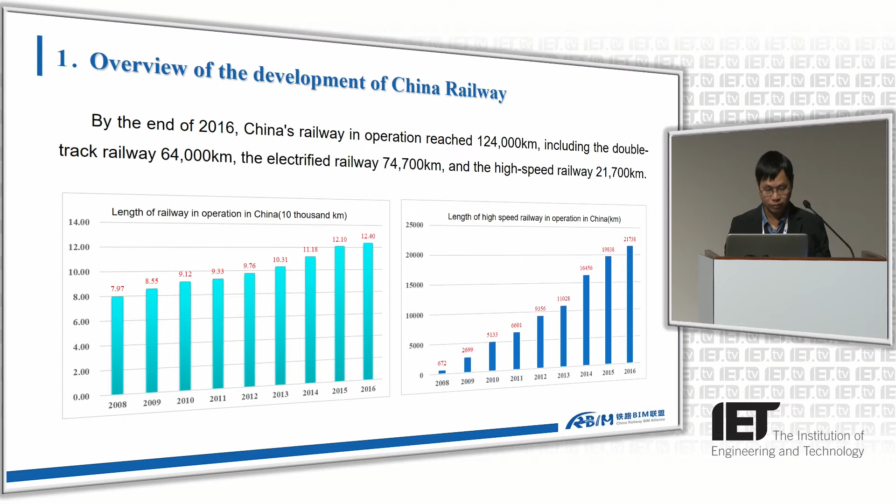By 2025, the scale of the railway network will reach 175,000 kilometers, including 38,000 kilometers high-speed railway.

Second, development of China Railway BIM Standard. Railway is an important traffic infrastructure. Its informatization is an important carrier and means to realize the intelligent railway and railway modernization. China Railway Corporation introduced the BIM technology in 2013 for the life cycle management of railway. However, the existing BIM standards do not cover the railway industry, so the research on railway BIM standard needs to be carried out.

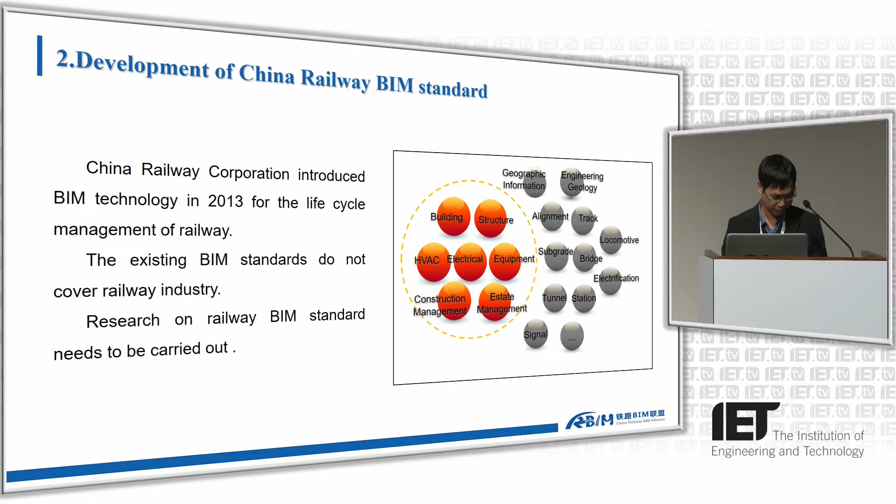In December 2013, the China Railway Corporation and other 7 governing units established the China Railway BIM Alliance. As the first BIM technology self-regulatory organization, CRBIM takes the responsibility to promote railway BIM technology progress in China, aimed at building a public service platform for BIM technology, overall planning and policy recommendations, standards development, application technology research, research training, technical services and consulting, international exchanges, and cooperation.

CRBIM currently contains 72 members and has a profound impact both at home and abroad. We have 11 national laboratories, 17 post-doctoral workstations, 8 enterprise-level BIM research bases, 2 national BIM qualification training centers, including the National Engineering Laboratory for high-speed railway system testing.

CRBIM gathered the top scientific research, survey, design, construction, management, operation and maintenance, and manufacturing enterprises, and related key universities in China, and has the capability of production, learning, research, and utilization, and whole industry chain integration innovation advantages.

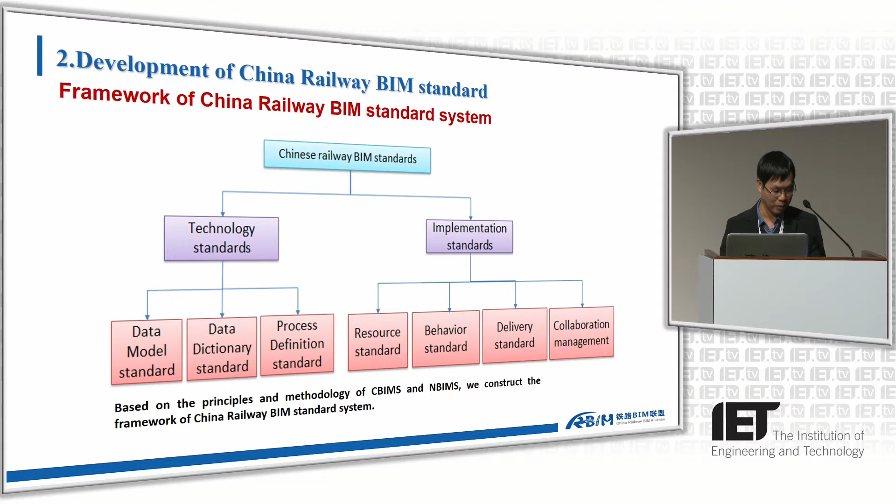Based on the principles and methodology of CBIMS and NBIMS, we construct the framework of China Railway BIM Standard System. Technical standards are basic standards. It is the basis for formulating implementation standards and deeper application of BIM, which can be used to guide and standardize the development of railway BIM software. Implementation standards are the usage specification of technical standards. Enterprises can standardize their own working procedures, management models, resource construction, environmental configuration, and deliverables.

Railway Data Model Standard Part 1 and Classification Coding Standard were promulgated in 2014. Railway Data Model Standard Part 2 was promulgated in 2016. And a series of delivery standards were promulgated in September of 2017.

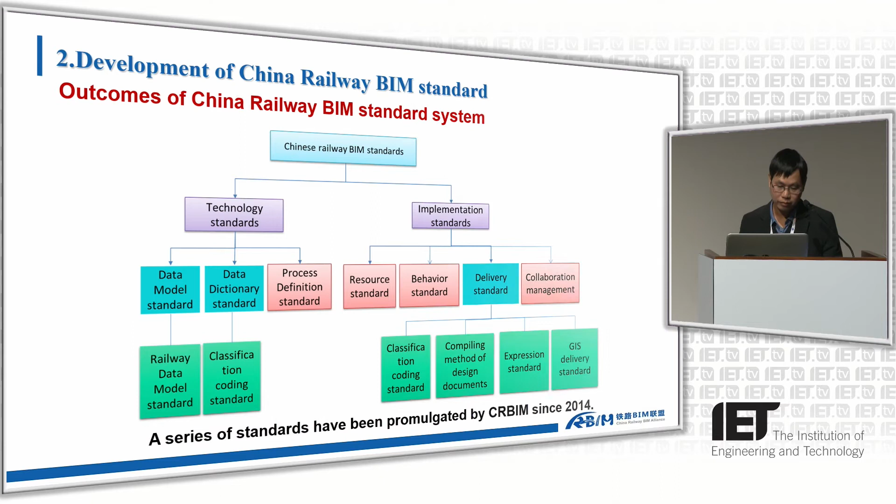Railway data model includes compilation scope, application scope, and content. Compilation scope currently covers 12 domains in railway engineering, including alignment, track, subgrade, bridge, tunnel, station, drainage, geology, communications, signaling, power transformation. Application scope: railway engineering BIM implementation standard formulation, BIM software development, and BIM application research. And the content includes general rules, terminology, and multiple professional domain models.

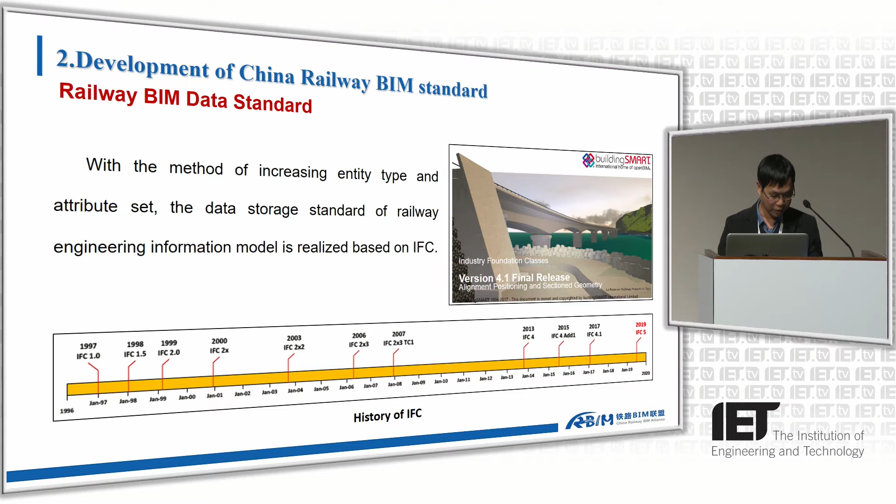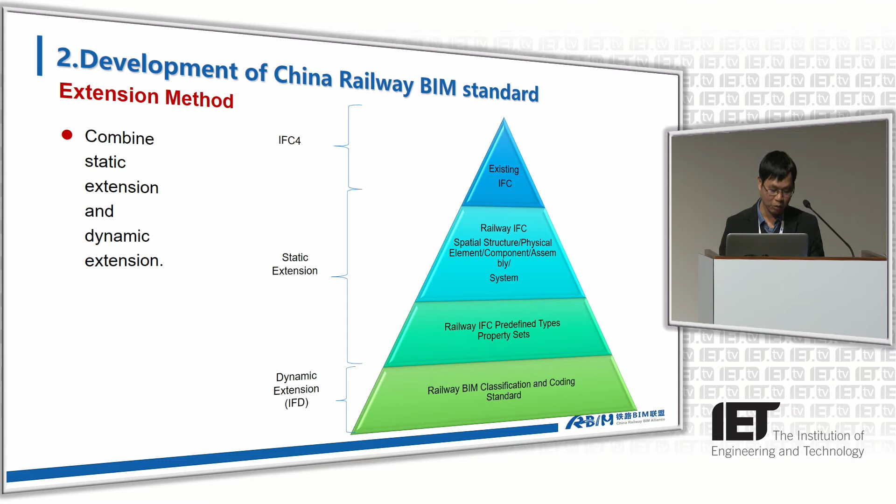With the method of increasing entity type and attribute set, the data storage standard of railway engineering information model is realized based on IFC. We combine static extension and dynamic extension together. Static extension refers to the definition of the entity in railway engineering professional fields on the basis of IFC4 model, following the inheritance principle of object-oriented thinking. Dynamic extension means that the IFC model is not changed on the basis of the existing IFC entities, and specific types of entities are identified by citing railway BIM classification and coding standard.

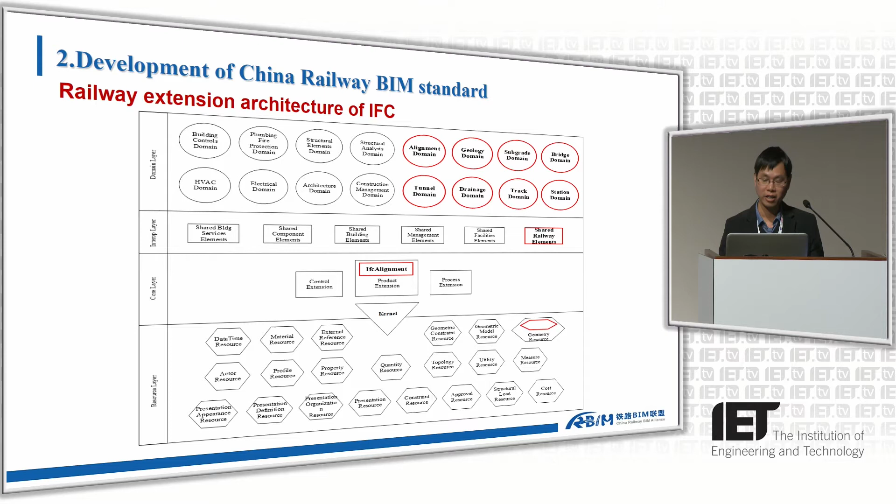In resource layer, we add the definition of alignment to the geometry resource. In core layer, we extend IfcAlignment type to represent the alignment of railway. In interop layer, we add the definition of railway engineering sharing mode, including public type, public space structure, public parts, and public attribute set. In domain layer, we extend 8 professional areas, including alignment, track, subgrade, bridge, tunnel, station, drainage, and geology. This is a spatial structure of railway engineering.

The railway project may include one or more railways or railway terminals. The railway can contain one or more alignments, tracks, subgrades, bridges, tunnels, railway stations, and buildings. A railway terminal can also contain a series of railways and a railway station.

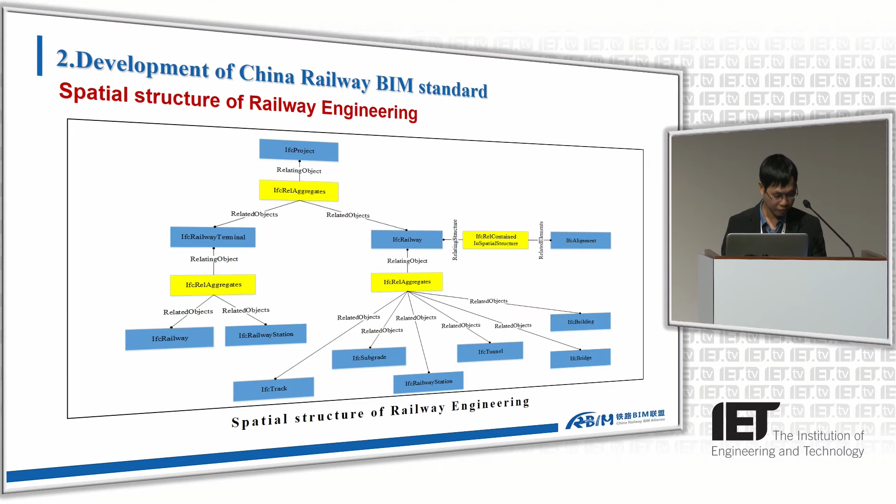This is the concept composition of railway IFC standards: spatial structure element, assembly, physical element, component, system, and property set.

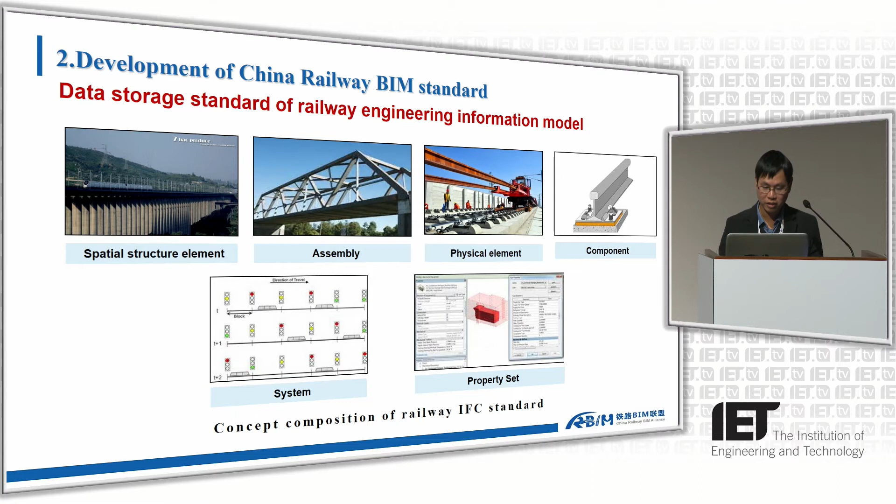Internationalization is a basic principle in the study of the Chinese Railway BIM standard. Since 2015, the China Railway BIM Alliance has participated in the buildingSMART Summit 2 times a year. Approved by buildingSMART, the English version of the data storage standard for railway engineering information model was published in 2016 as an open standard.

And the last one, verification of the China Railway BIM standard. China Railway Corporation started 16 pilot BIM projects, including 3 complete sections, 3 bridges, 3 tunnels, 1 subgrade section, 3 stations, and 2 projects for electric power, traction power supply, communications, and signaling railway engineering.

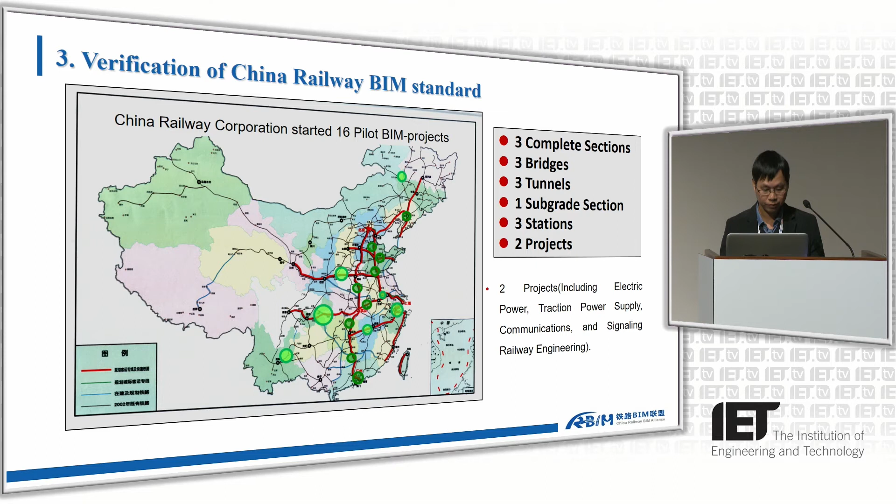This is the application of tunnel, geology, bridge, station, and a complete section.

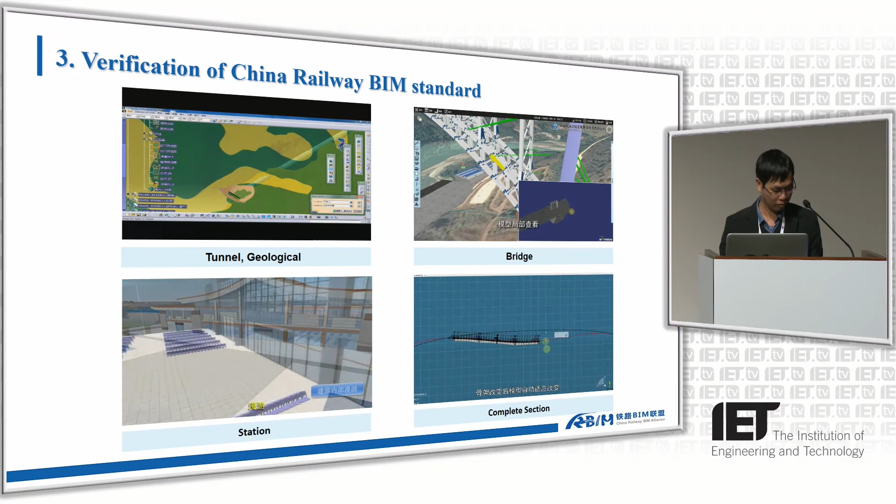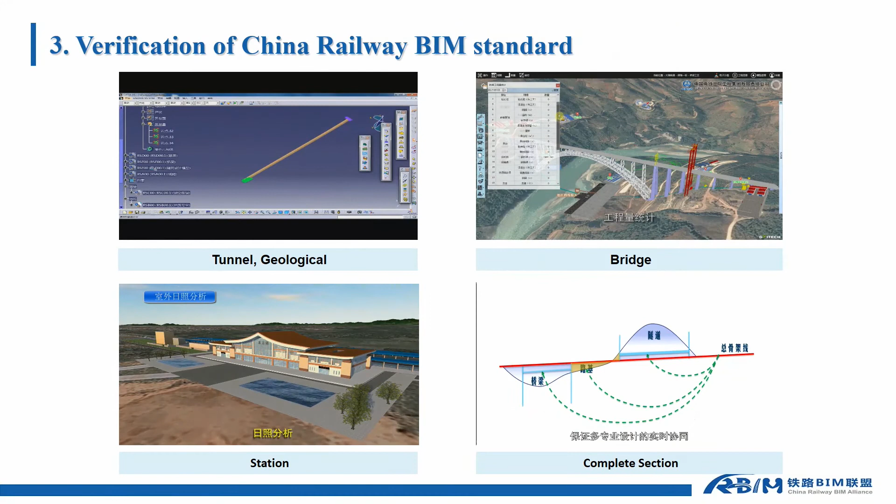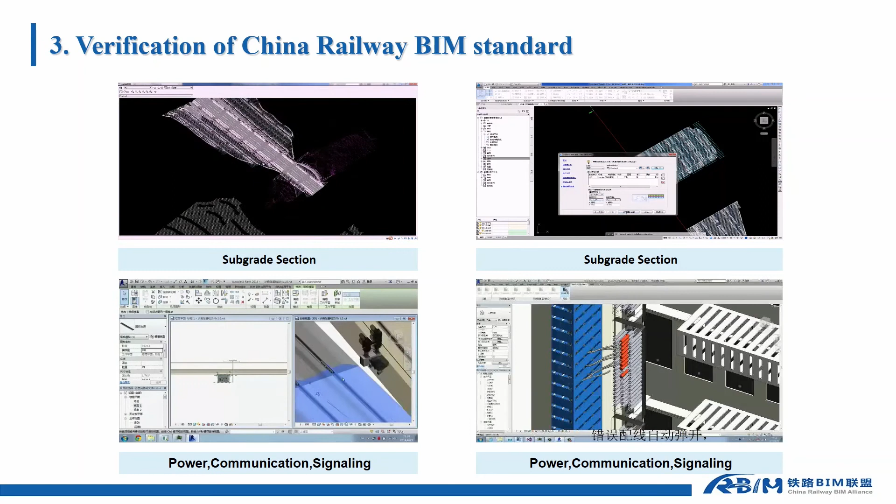And this is the application of subgrade section, electric power, traction power supply, communications, and signaling railway engineering.

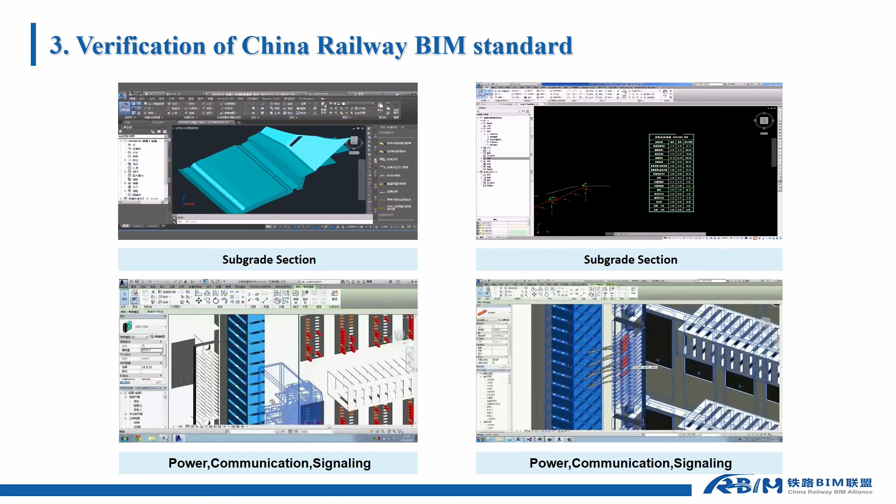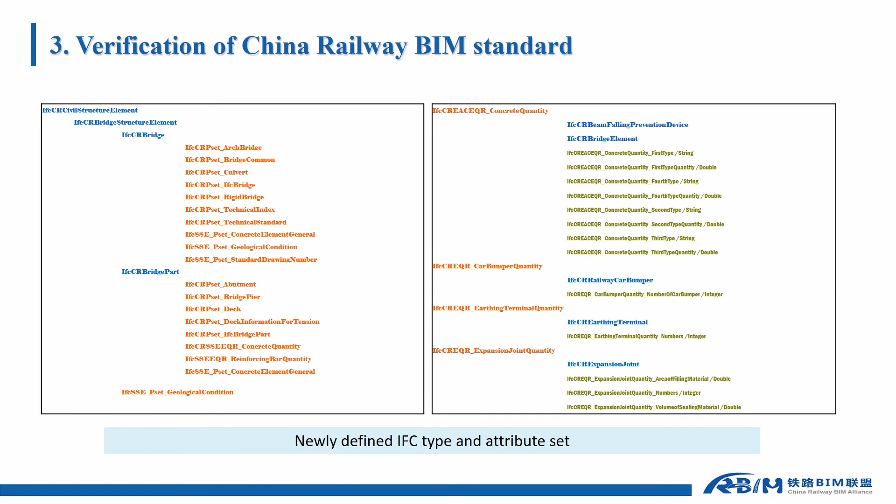In order to promote the application of BIM technology in China Railway, CRDC developed a software package to implement railway IFC standards, in which a new type for design management and a new attribute set for project quantity calculation are added. 195 types and 349 attribute sets are contained in the software package.

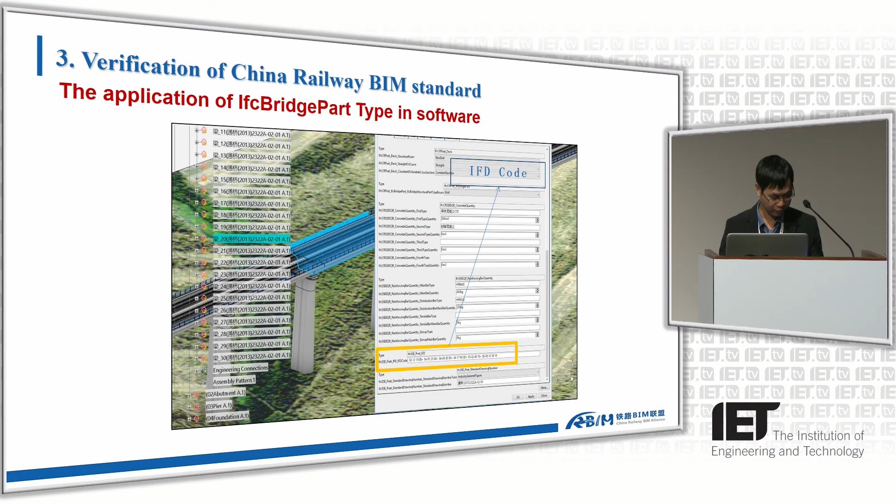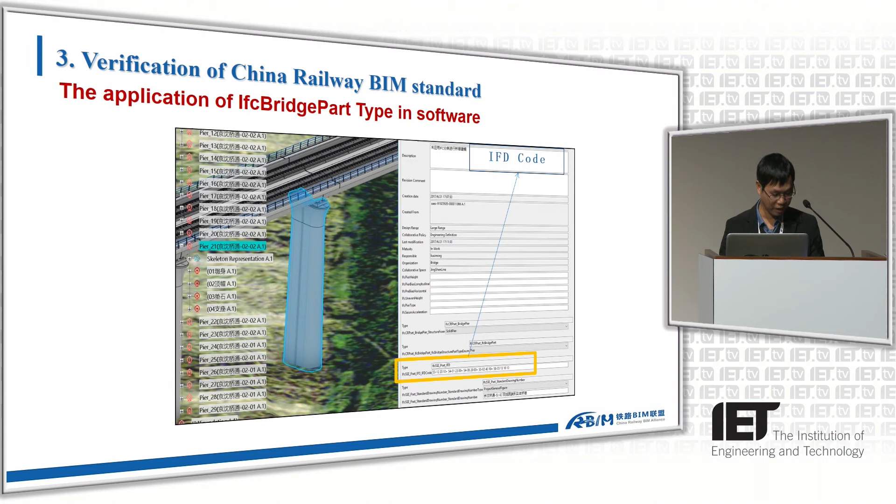The highlighted part of the picture is a simply supported girder. The predefined type of IFC bridge part is girder, which has a complete set of attributes and can be matched with the IFD code. The highlighted part is a railway pier. The predefined type of IFC bridge part is pier and also has a complete set of attributes and can be matched with the IFD code.

In the 2017 Barcelona Spring Standard Summit, CRBIM introduced the IFC Rail project proposal and the verification work of tunnel and alignment standards, and signed a memorandum of understanding on the establishment of IFC Rail with buildingSMART, Germany, France, Sweden, the Austrian Railway Company, Finland, and the Swedish Transport Bureau.

Under the organization of buildingSMART, CRBIM is responsible for the compilation of the IFC Rail international standard and participates in the preparation of other standards involved in infrastructure, such as IFC Common Schema, IFC Bridge, IFC Alignment, IFC Tunnel, IFC Road.

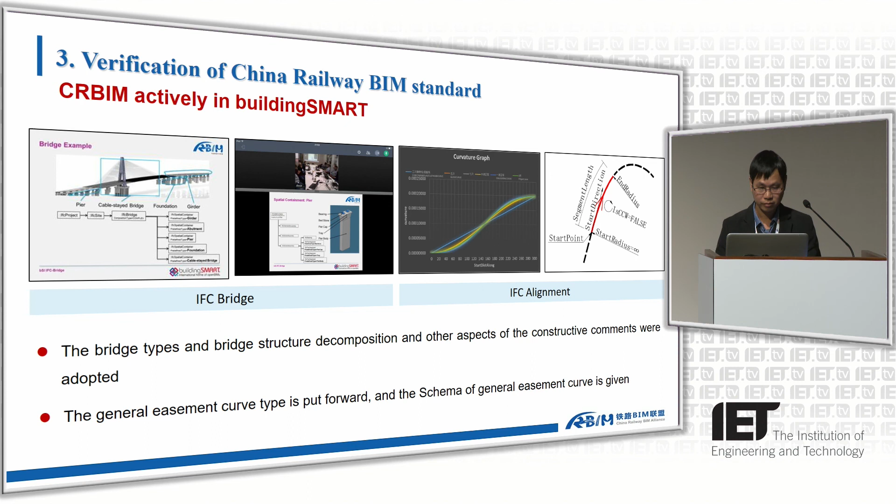We participated in IFC Bridge project discussions 8 times. The bridge types, the bridge structure decomposition, and other aspects of the constructive comments were adopted. The general easement curve type is put forward, and the schema of the general easement curve is given. The above series of standards will become a part of the IFC 5 standards.

And this is our next step. Relying on the pilot projects and engineering practice, continuously improve and verify the China Railway BIM standard. Under the framework of BSI, actively carry out IFC Rail, IFC Common Schema, IFC Bridge, IFC Tunnel, IFC Road, and other standard preparation work.

This is our suggestion. Accelerate the development of the IFC Common Schema project. Lay the foundation for IFC Rail, IFC Road, IFC Bridge, IFC Tunnel, and other standards. We hope that IFC 5 could be released as soon as possible under the organization of BSI.